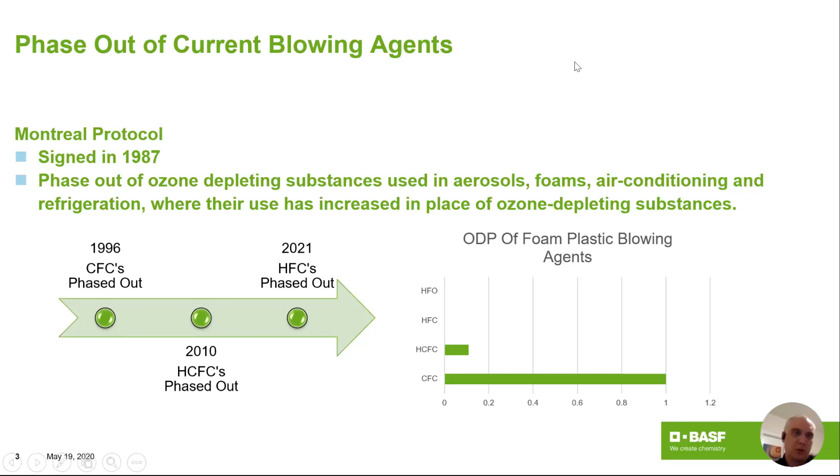On the ozone depleting side of things, everything worked very well, going from CFCs with an ODP value of 1 down to HCFCs with around 0.1. And then both HFCs and HFOs have a zero ozone depleting potential. So the Montreal Protocol worked really well with that worldwide.

That's where the Kigali Amendment came in, to ride on top of the Montreal Protocol and use the same framework, because it was specific to blowing agents and refrigerants. It was actually implemented at the beginning of last year in Canada, and that began with a phase down in what was allowed to be imported into Canada. There's no actual manufacturer of hydrofluorocarbons in Canada—everything's imported into the country, so it's pretty easy to regulate at the border crossings. That was already begun on January 1st, 2019.

We haven't seen it too much in the foam plastic side of things because it was mainly the refrigeration side, especially the transportation market and the OEM suppliers. Here in Southern Ontario, they actually did a big phase out and changeover. So that phase down in what could be imported helped reduce what we, as a foam plastic sector, needed to worry about.

Looking at the GWPs, these are kind of average numbers I put together. The CFCs are sitting around 4,700 GWP100; the HCFCs were around 1,600. Then the HFCs on average have a big range, but I just ballparked it at around 1,000. Of course HFOs, the actual molecule itself is roughly around a GWP of 1, so that's why it's showing up as 0.

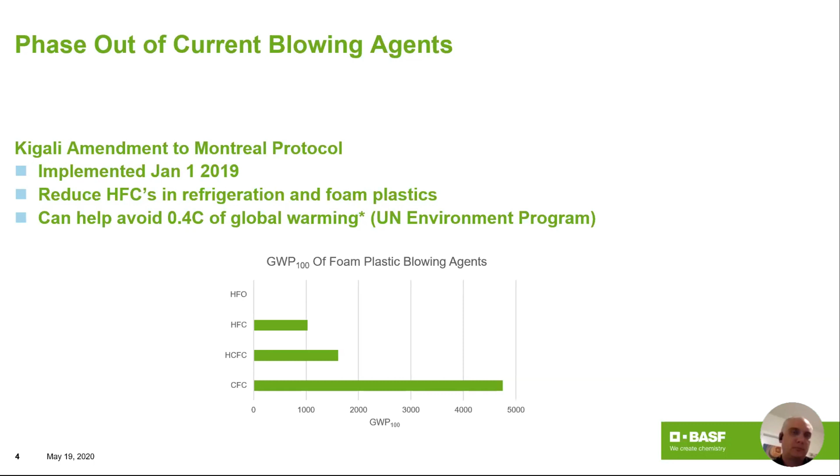The big thing for foam plastics is they can no longer be used after January 1st, 2021 if they contain HFCs. On spray foam, you'll see this on the next slide, but basically the resin component that has the blowing agent in it will expire as of December 31st at the end of this year. We're already in this 10% phase down, as I talked about, but that's on imports into Canada, so it's not really affecting our industry directly. The typical replacements are HFOs, or hydrofluoroolefins.

These are the Honeywell Solstice and Chemours Opteon type of products that are being used in spray foam installations. And BASF, we have our product called Walltite CM01. We've had this commercially available for, I think, about 3 winters now. Winter is a very significant mark because these products are applied on site, so it's very critical to make sure that in Canada the chemistry still works when it's minus 10 or minus 15 degrees Celsius outside. That's why we're pretty comfortable going in with our Walltite CM01 product, knowing that it's going to perform year round in the market up here in Canada.

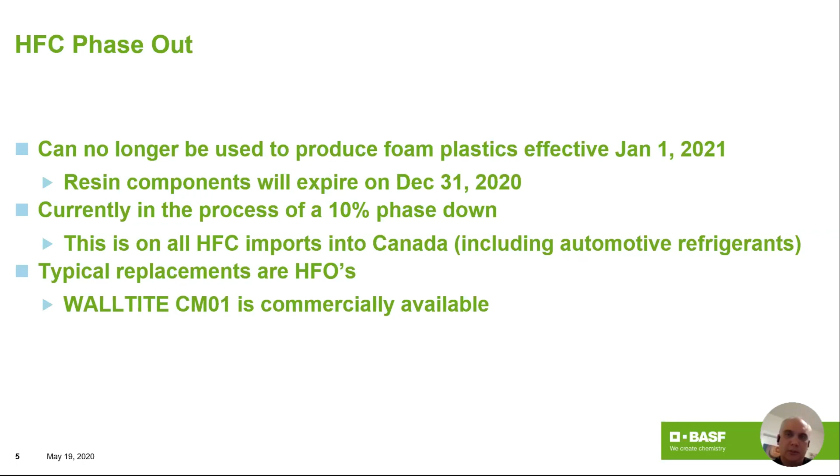Where the blowing agent resides is essentially on the resin side. Spray foam is sold to the spray foam contractor with a drum of isocyanate and a drum of resin components. The isocyanate basically makes up half the material. It goes through a proportioner that measures it 1-to-1 by volume to control the ratio. The resin components are where all the magic happens, with regards to how you're making these products unique and specific, getting the types of physical properties you want out of it. The blowing agent makes up about 10 to 20% of the resin components, so about 5 to 10% of the overall finished foam product.

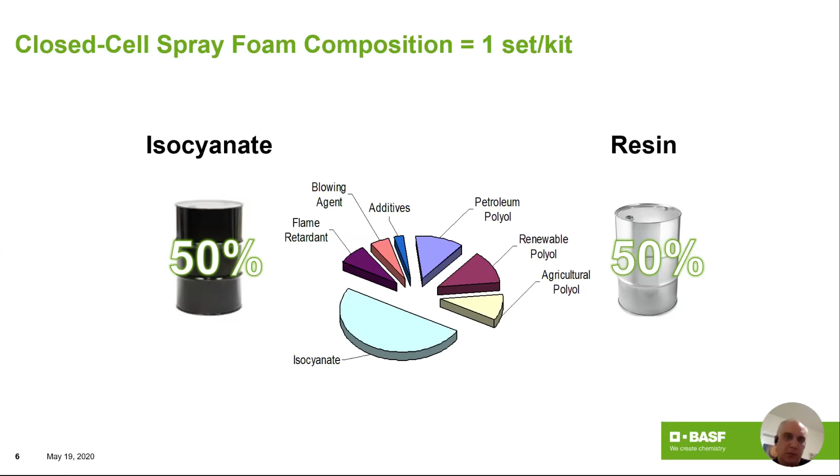And all these products, they're all sourced in North America, kind of around the Louisiana, Gulf Coast and New Jersey markets. I'm going to talk a little bit about LEED later on as well too, if we still have time. So I just want to kind of mention that a little bit there.

So what's changing on the foam properties as they go from HFC versus HFO? As a chemist that formulates this stuff and is very proud of the performance of our HFC products and how they perform in the field, it's pretty critical to make sure that the actual installers didn't notice any difference when they're spraying one product to another. So our product specifically, very, very happy to see that our installers don't notice a difference when they're switching back and forth.

On a physical property side of things, not a lot of stuff has changed. The density ranges between the different products that are commercially available are still the same. It's still a gaseous blowing agent that the closed cell spray foams are using. The R value per inch is lower. There's two reasons for that. The first one is just the molecule in and of itself has a slightly lower R value.

And it's a slightly lower loading into the resin component, so there's not as much blowing agent in there, so that's bringing down the R value slightly. But also the test method to test the LTTR has also changed along with some of the spray foam standards. So again, I'm just going to do a little bit of a slide on that quickly, but I won't get too much more into that.

But all the other properties, such as the air barrier material, vapor barrier, low water absorption, can be used interior and exterior and also provide structural strength. None of those properties have changed going from HFCs to HFOs.

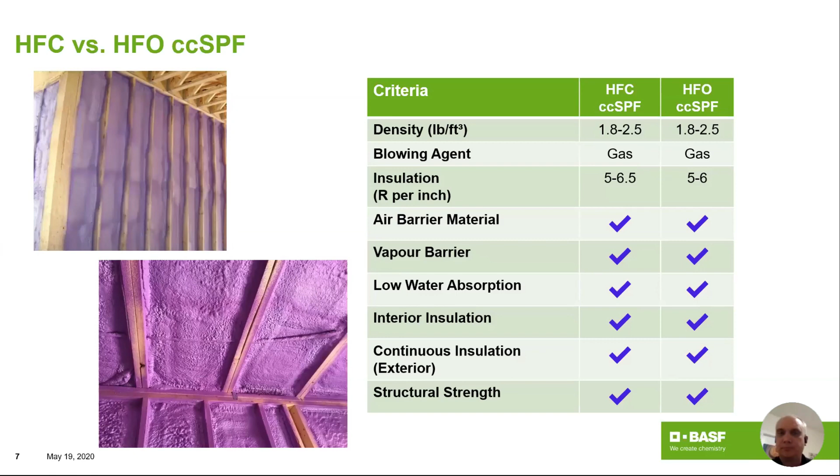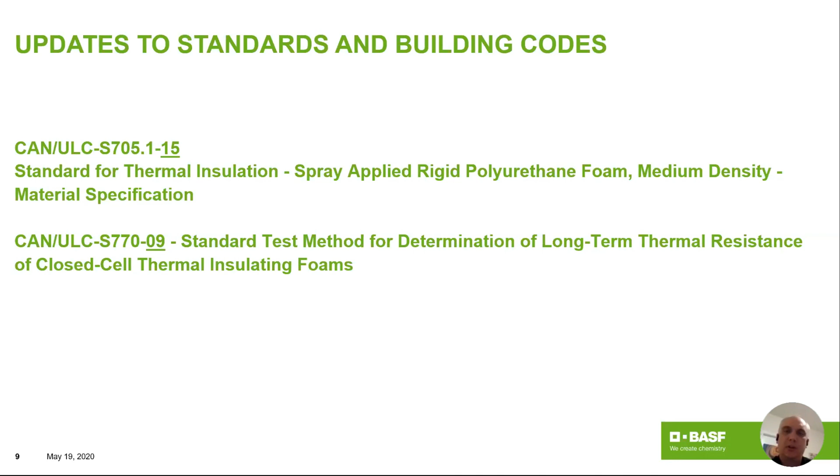So updates to the standards. The old HFC standards were on a 2001 version for spray foam that used, they had some couple amendments in them. That's why there's a 2003 LTTR standard in there. Then with the latest building code editions, the latest spray foam standard is a 2015 standard that references a more exacting or more extreme version of the LTTR standard that's giving a little bit different numbers based on the calculations used.

So again, the big differences for the spray foam standards, not completely separate from the HFOs, but it's just the timing's the same. But the more complex LTTR procedure, we removed the initial thermal resistance requirements because it didn't really mean anything in the standard. It was basically being misrepresented in the field where people or spray foam installers were claiming R7 per inch, causing confusion out there.

Where the building code essentially is saying you need to use the LTTR values for your design values. You added a fungi resistance requirement and also added some more stringent dimensional stability limits, knowing that there were going to be some blowing agent changeovers, and just to make sure that the products are still continuing to perform in the field as we know that they can perform in the lab.

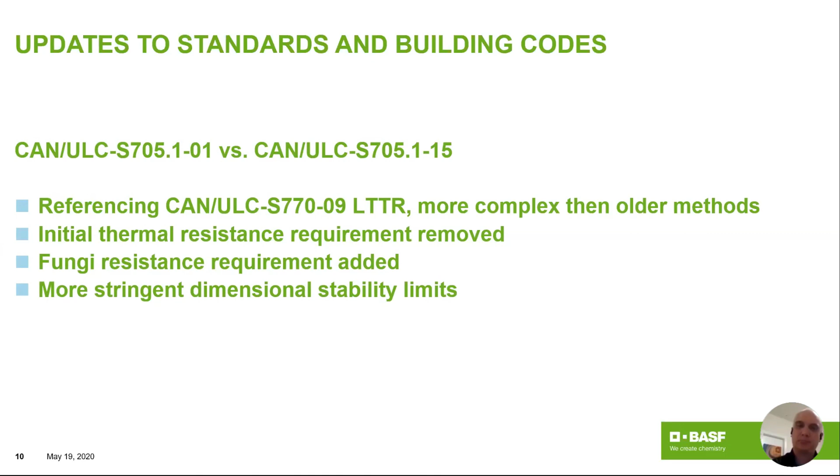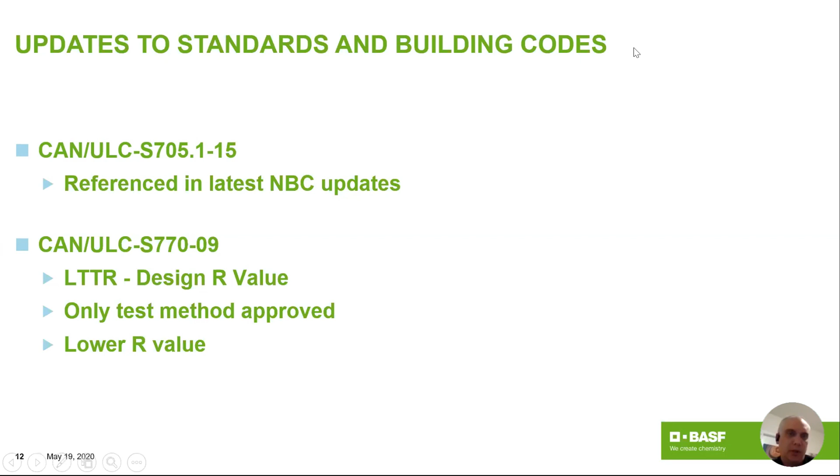So the 2015 version of the standard, that's in the latest National Building Code, and that's what's referenced as the 770, the latest LTTR standard as well. So all the new code updates that are coming through will be referencing the newest standards, and that's why you're seeing a little bit of a difference in some of the values that are being reported.

Getting into a little bit on the use phase before I get into kind of a little bit on the environmental impact. So again, the same advantages are there. So it's got a high R value insulation, provides an airtight seal, and with proper detailing, it can give you an air barrier system throughout the whole wall assembly or the ceiling assembly, as long as you're paying attention to the details on that. It's an effective vapor barrier.

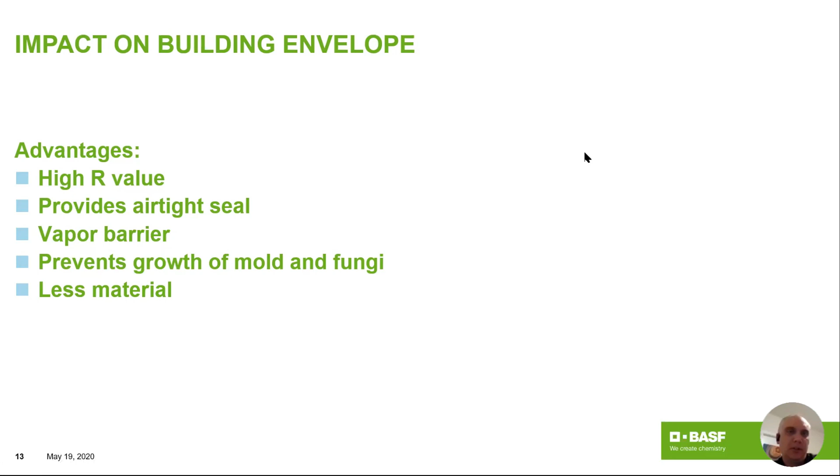So, it prevents growth of mold and fungi by controlling that moisture, and it's a lightweight insulation, so it does provide less material is required to go in the building to get that insulation impact. So just a couple of highlights of where it can be used in the building envelope very effectively.

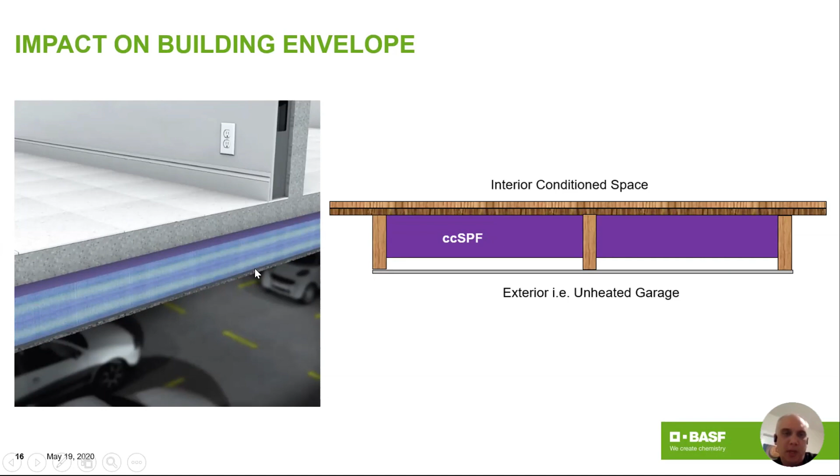So this would be the underside of a garage ceiling or a parking garage, essentially just spraying in between the joists or spraying underside of the concrete slab, and then making sure that there's a thermal barrier on top of that to be code compliant.

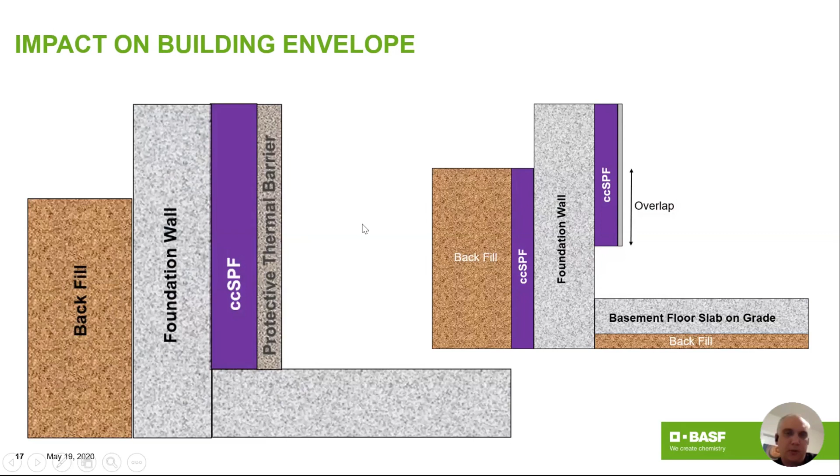It can be used below grade, both on the exterior and also on the inside of the foundation wall. As long as the drainage plane is there and there's good water drainage, which hopefully you have on your foundation walls, then you don't need to worry about any kind of water absorption.

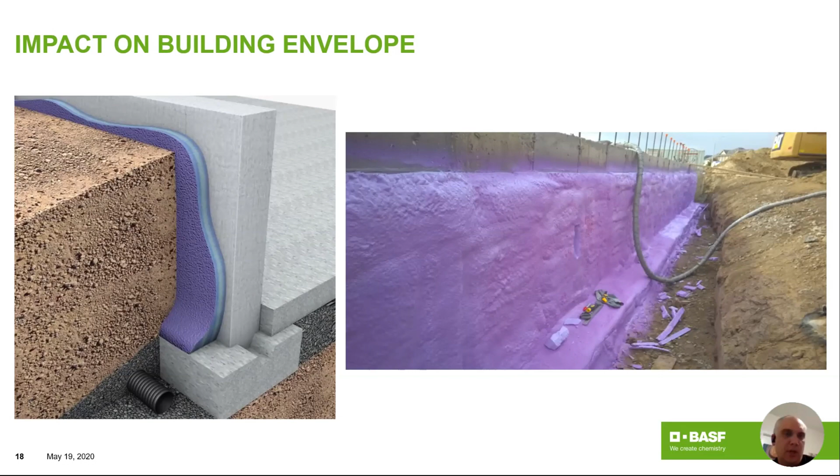We have research through the National Research Council showing how the products perform very well in these types of applications with very minimal water absorption and no effect on the thermal performance of the foam products.

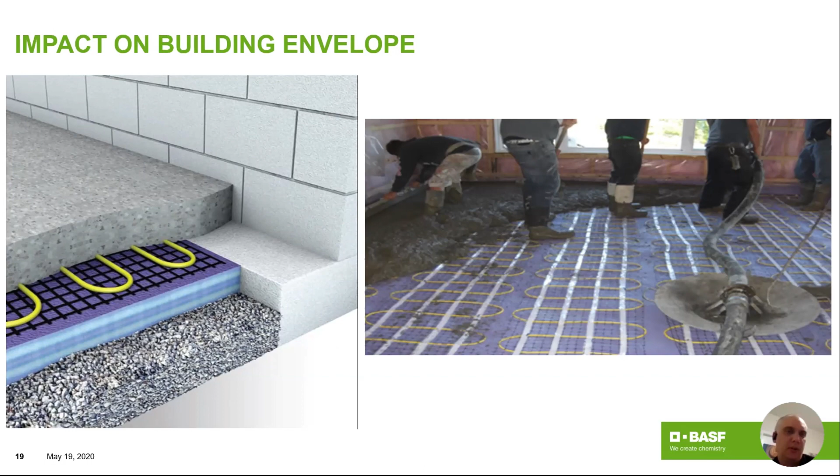Again, proper detailing there. It can also be used on slab below grade. Here they're using, you can see the radiant floor heating in there before they pour the concrete on there. Again, when it's detailed properly and tied into the wall system, it can be used as a radon control barrier as well too.

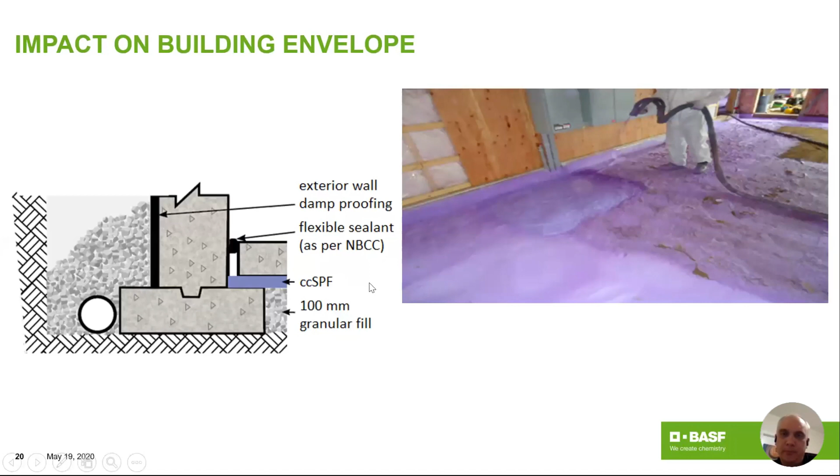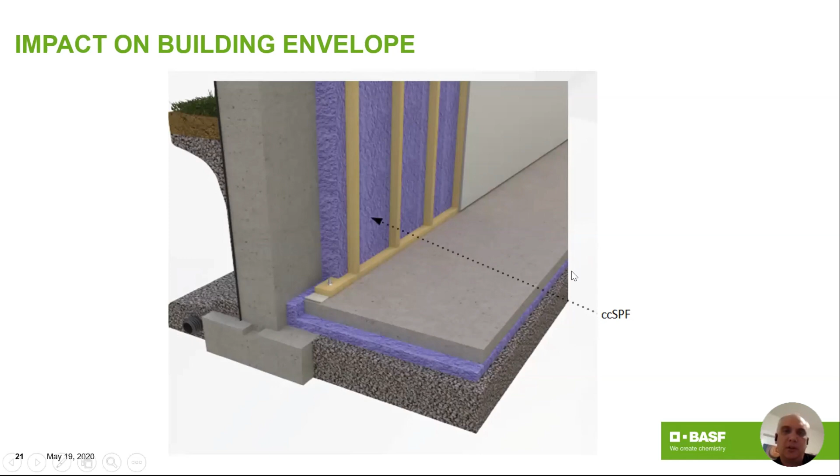Again, you get the same performance out of your HFOs as you do out of your HFC-based spray foam products. If you're spraying the basement, you can continue it up on the interior wall of the basement. Effective R value is a big thing now all across the country, and builders are still trying to get a grasp on it. The Vancouver area is a lot more advanced on effective R value designs. In basement situations, the easiest thing to do is move the studs off the wall by about 2 inches, and suddenly you have 2 inches of continuous insulation. You can tie it into the rim joist properly, and a good spray foam installer will detail it to make sure they get all the air sealing required.

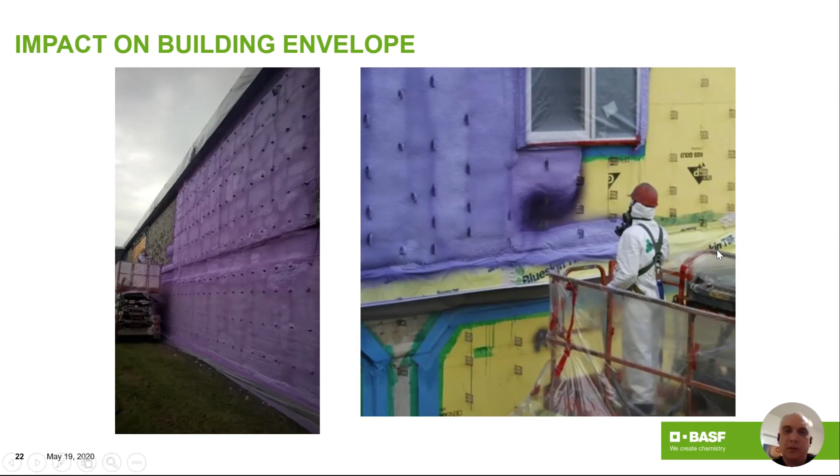Moving over to commercial style buildings, again cavity wall insulation out on the exterior, spraying right around the brick ties. One advantage of using spray foam in these applications, closed cell medium density spray foam, is that it's an air barrier material and a vapor barrier. Applied at least 2 inches thick, it seals around all these areas and over all those joints, with very little requirement for accessory products to get a complete air barrier system. So when you're looking at the EPDs of the overall wall assembly, to get that air barrier system it really is just the spray foam insulation you have to look at for that product value. Otherwise you're looking at a couple accessory products, transition membranes and caulkings, to help tie things in with through-wall flashings and window penetrations.

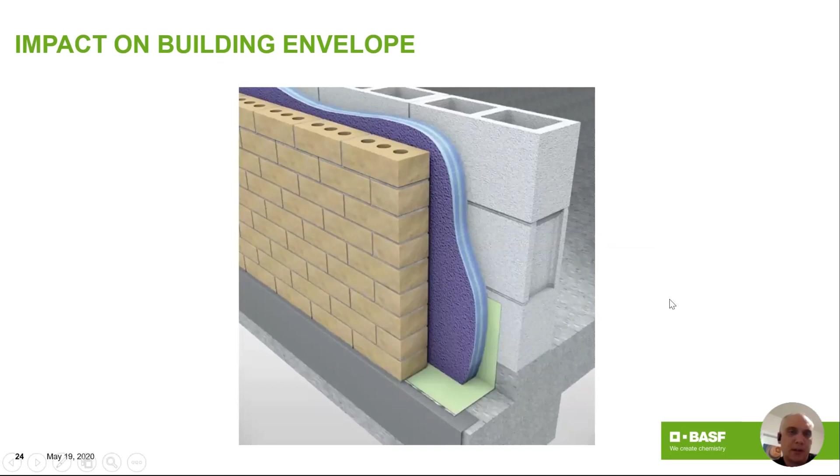Just some more pictures of cavity wall installations, three floors on there, again going onto concrete block backup. Very common in institutional applications.

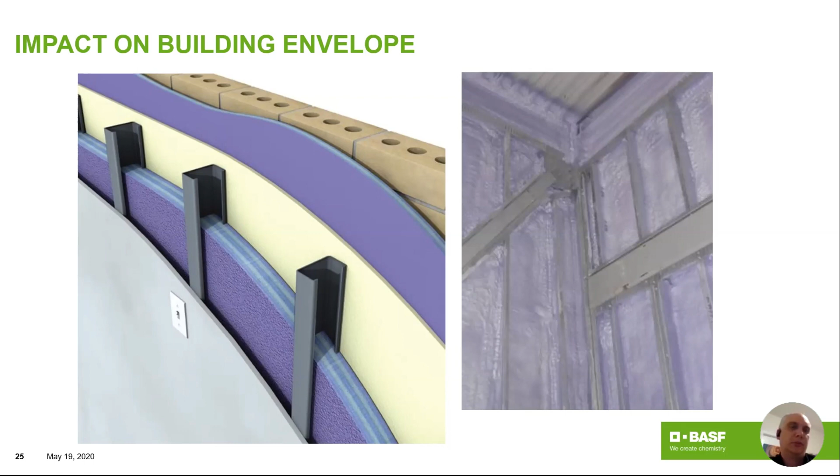Getting into steel stud assemblies, again like Randy was saying earlier, this is an area that needs to be carefully applied, especially in the wintertime when it can be very cold. So we're always training my customers and installers to make sure that when they're applying this there's a little bit of heat in the building so there's no thermal shock. You can get continuous insulation on the outside, and spray foam is a great way to do that too, adding additional R value on the interior. The installer needs to make sure they get their guns into those spray foam channels, into those C channels. Everything's nice and clean, they spray the foam in there, and then they do their visual inspections afterward to make sure there's no cracking in those areas.

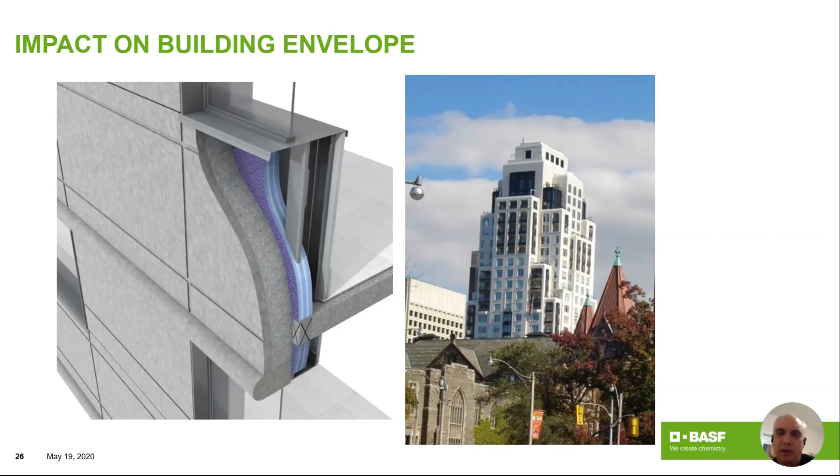Getting into some of the precast concrete buildings, we're starting to see apartment-style buildings too. Again, they're doing these a lot like they do basements, offsetting the steel studs from the wall so you get 1 to 2 inches worth of continuous insulation installed from the inside before the studs go in. This gives a little more room going into the stud cavity to run electrical afterward if they choose, and put the drywall in there. So again, a very effective way to add a bunch of insulation value into those concrete walls. It's just a matter of working out the effective R value calculations to make sure you're getting the target effective R value you're looking for.

Going into the EPDs, a little bit more in depth on the HFO closed cell spray foam. Hopefully you guys, if you're on here, have read through the EPDs and are somewhat familiar with them. I did a very similar presentation in Toronto in December, and when I asked a room full of architects who's read an EPD, nobody put their hand up. So hopefully you guys have had a little bit more experience with it.

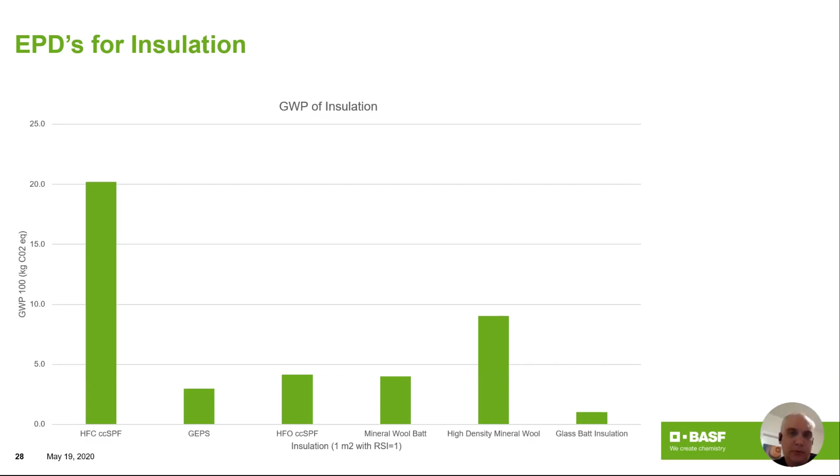So bringing this over to the commercial architectural side and where all this comes together with LEED V4, with the environmental product declaration on spray foam, you get some points for that. The industry used ASTM to do our EPD. So if you search for ASTM and EPD-085, it'll come up. Due to licensing requirements, I can't distribute that or mail that out. I always have to refer people to the ASTM website to actually look at the EPD.

Additionally, using health product declarations, you can get credits for that. We're working with HPD Builder to show our product ingredient disclosure list, which is essentially a safety data sheet. Then it's a site manufactured product, so you get LEED points for that. And also it's classified as a low emitting material, using the Green Guard and Green Guard Gold standards. A lot of building construction products have these Green Guard and Green Guard Gold stickers on them. So what do they actually mean with spray foam being a low emitting material?

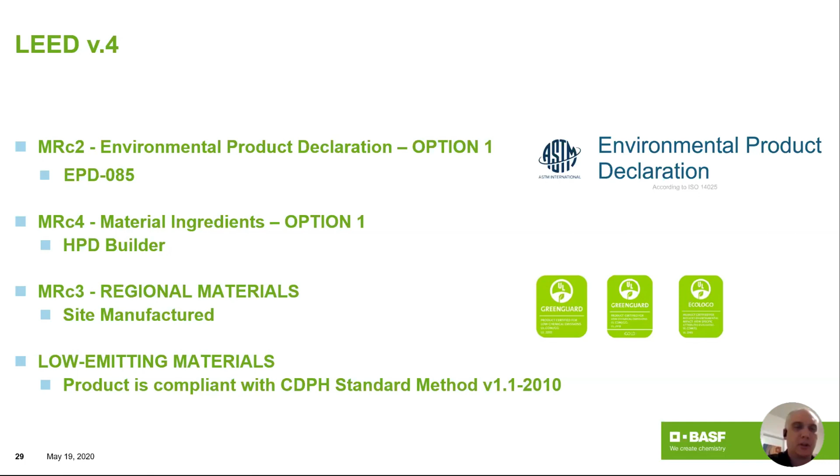They use a test according to the California Department of Public Health and basically evaluate the materials on a quarterly basis to see what's coming off. Is there anything toxic coming off of these materials? So with something that's properly installed by a certified installer, it's very easy to show that everything's deemed safe by UL Environmental, and that's where the Green Guard Gold certificate comes in. And again, that gets you some LEED points.

So it seems like I went through this very quickly. I think I got it in around time. I think there's probably a bunch of you that are waiting to go for dinner. So this is the end of my presentation. Just waiting for any questions out there on spray foam.

Yeah, we have one from Janice Ashworth. Janice, can you please unmute yourself and ask the question? Sure, yeah, can you hear me?

Mm-hmm. My question is, I understand HFC 134A and R134A are the same product. I'm wondering if R134A being used for refrigerant purposes is also being phased out with this regulation that comes into effect in January? Yes, that molecule, because it's an HFC, is being phased out as of January 1st, 2021. So it's not just foam plastic insulation, it's all refrigerants. Canada's targeting the molecules as opposed to the end use on these products. So yeah, that's going to be phased out as well.

So I guess my follow-up is, will the same replacements be used in the refrigerant application as well? Do you know? For refrigerants specifically, they're going to be hydrofluoroolefins, the HFOs, but there'll be different specific chemical molecules. I think Honeywell is still branding them under the Solstice trade name.

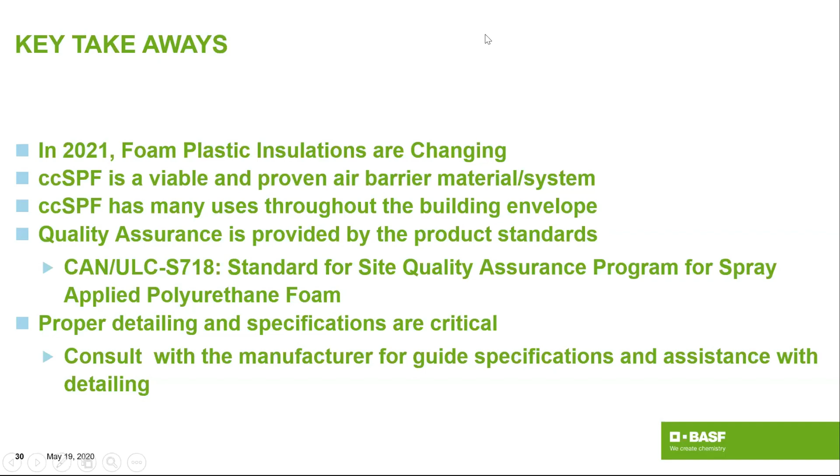But you are seeing the development of take-back programs in Europe. I think it's worthwhile if anybody wants to take a look at that. Just go into the European Union website and Google construction waste take-back programs, and you'll see that there's a lot being developed there on the regulatory side of things. So we're all going to be forced to do that, at least in Europe, soon. We don't have foam plastics in Europe, but we've got mineral wool in Europe, where we're seeing that become an important aspect of our business planning.

Yeah, and I'll also speak a bit. I think the question was also talking not just about the recycling of the insulation itself, but the interactions with other building components. So steel studs are easily recycled, but spray foam, does that impact the recycling of the steel stud? So I think that's a good point. I'll specifically address the LCA software side of things.

Within, for instance, a tool like Athena, you can't change end of life scenario assumptions. So they have sort of standard assumptions that they've made more on an industry average basis. Tally, I don't use the tool too much myself, so I'm not entirely familiar, but I don't think you can actually change the end of life scenarios either on that front.

And then with One Click LCA, depending on your tier of license, with the highest tier, you can actually change the end of life assumptions. So for instance, if you have the assumption that you're doing something special to enable the steel studs to be recycled in one scenario versus in another scenario, you could actually change that and see what the impact would be on that front.

Great, thanks everyone. Any other further questions? Oh, actually, Elise, did you have your hand raised? I'm not sure if that means you. Yeah, go ahead. I wasn't sure if that was going to work.